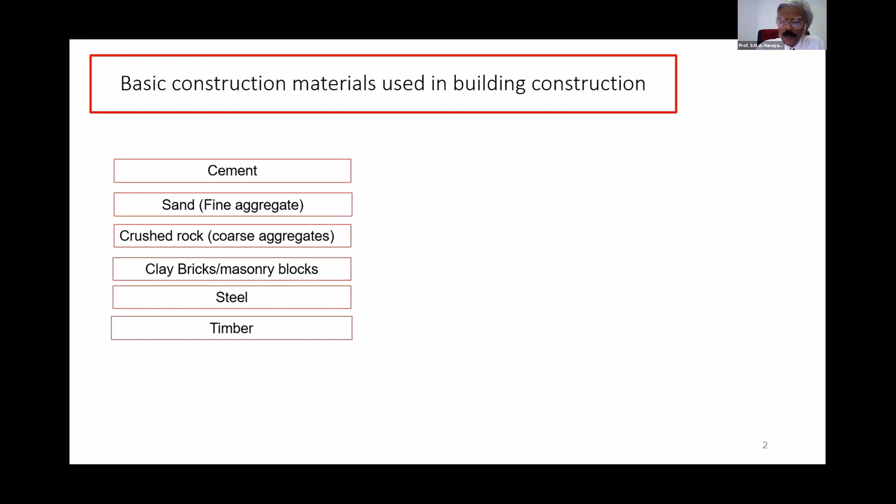These are basic construction materials used in building construction, and all these are natural resources. This chart shows the volume of natural resources used in building and transport infrastructure between 1900 and 2010. It can be seen that the rate of consumption has increased exponentially, especially with respect to concrete, sand, and gravel.

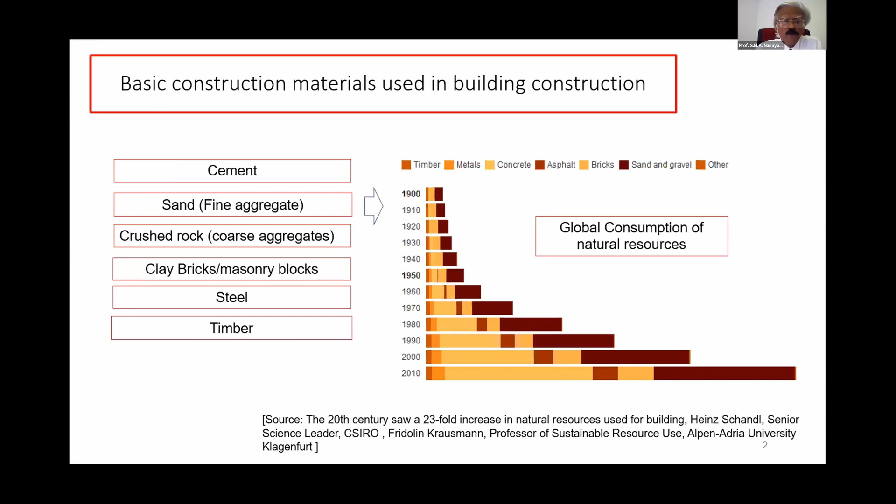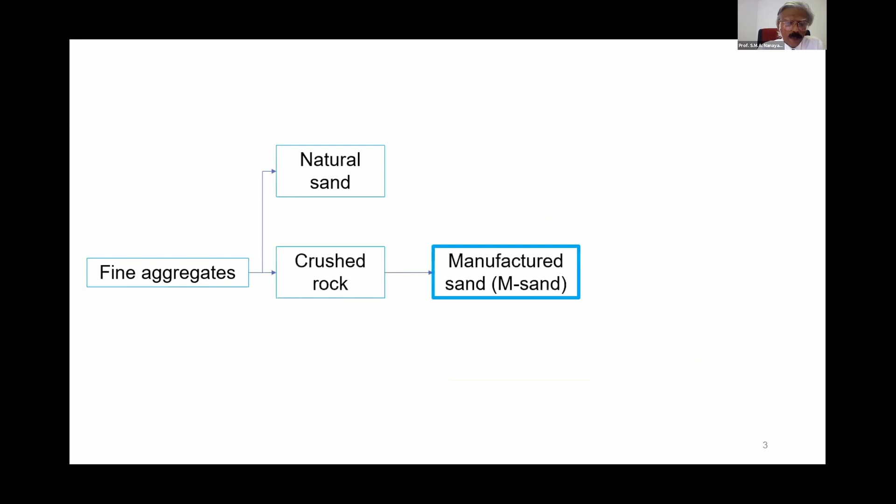The situation in Sri Lanka is not much different from that global trend. I'm going to explain the situation in Sri Lanka with respect to one construction material, that is sand. In civil engineering terms, we call it fine aggregate. Fine aggregate can be from different sources, either natural sand, crushed rock, which we call manufactured sand, or an industrial byproduct such as bottom ash coming from coal-fired power plants.

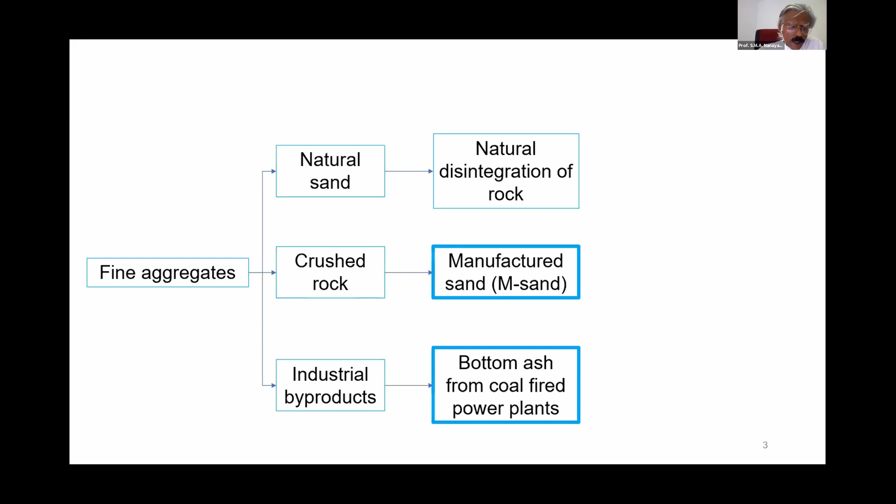The main source of natural sand used in the construction industry is river sand. There are other alternatives such as land-based sand, dune sand, and offshore sand.

Now, what's the situation with respect to river sand in Sri Lanka? This graph shows the current issue related to river sand in Sri Lanka. It shows the price variation of cement and river sand as construction materials over the last 28 years. Up to 2003, not much increase in price, and not much difference in increase in price between these two construction materials. But beyond that, the river sand price has increased by 30 times due to shortage of supply.

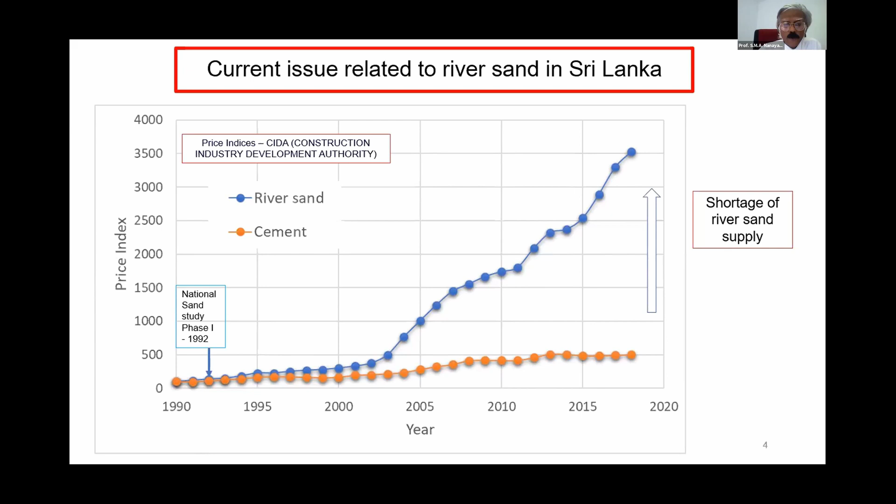This is as a result of mining and transportation restrictions imposed by the government. This trend was expected way back in 1992. There were several studies carried out in 1992, 1995, 1999, and 2002, proposing several options to overcome this situation, but those proposals were not fully implemented. The last one was in 2014 by the CIDA. The current sand price is about 16,000, varying from 15,000 to 16,000, which is very, very expensive compared with other construction materials, even with the world price.

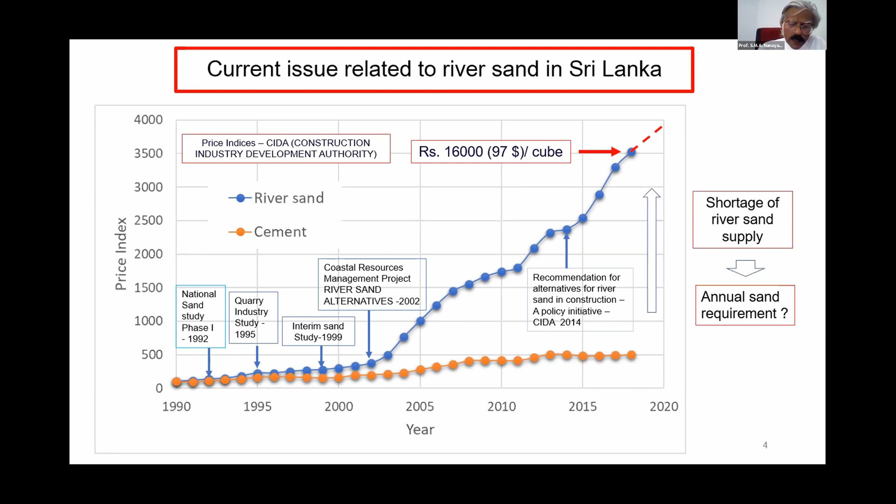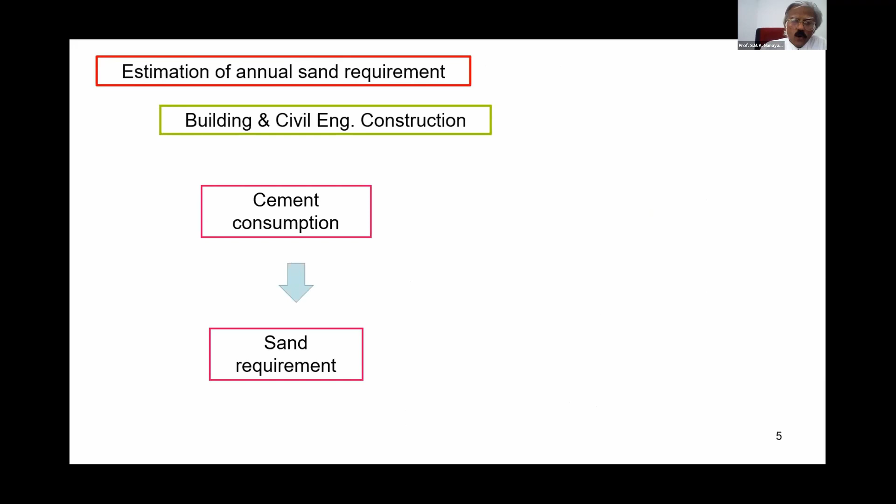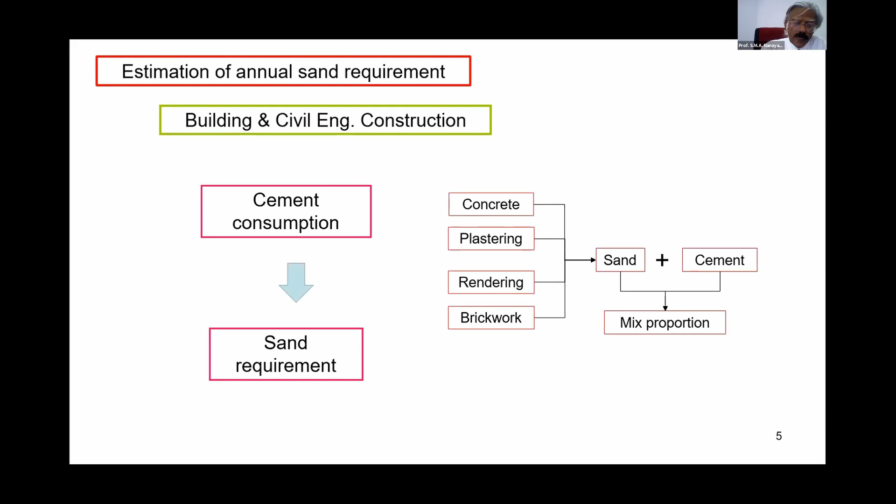Unless we come up with a solution to this, this trend will increase. So what is the annual sand requirement in Sri Lanka? Estimation of annual sand requirement for building and civil engineering construction - since there are no proper records of sand mining, the annual sand requirement was estimated based on cement consumption, as mix proportions of cement to sand for various applications in building construction are known.

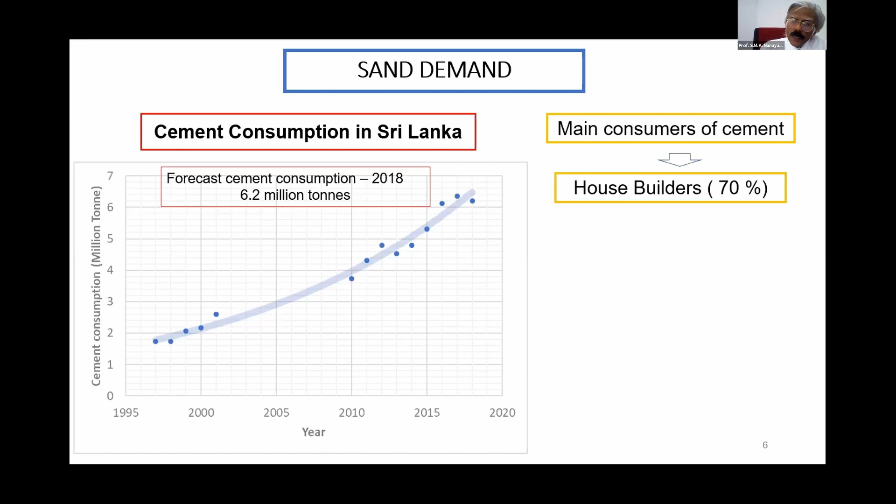According to cement manufacturers, the main consumers of cement are house builders - about 70% of cement manufactured and imported to Sri Lanka is consumed by house builders. The estimated sand demand based on cement consumption in 2018 was 22 million. Out of those 22 million, 40% was consumed in the Western province.

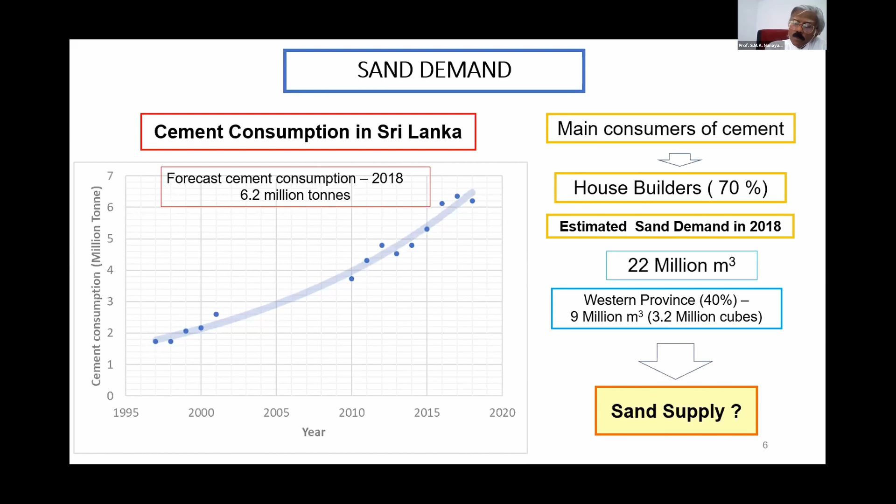Now, how about the supply of sand to the Western province to fulfill this demand? This shows the main river basins. All these main rivers were heavily mined to meet the increase in demand.

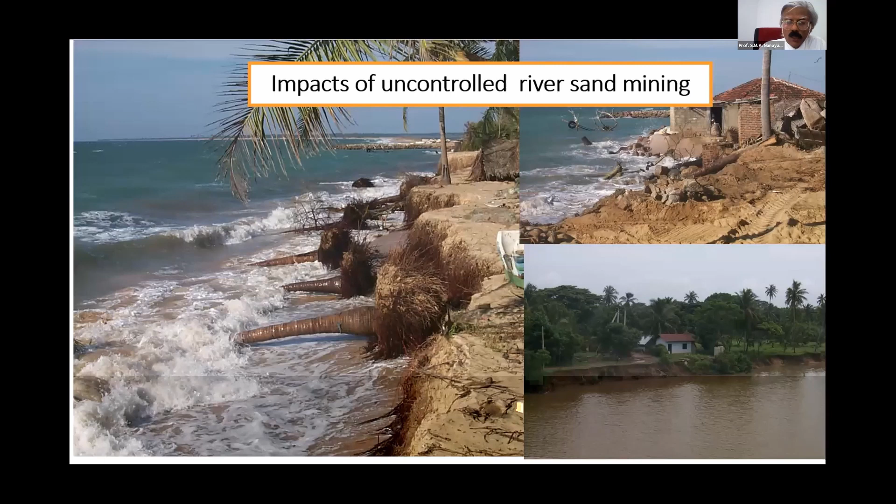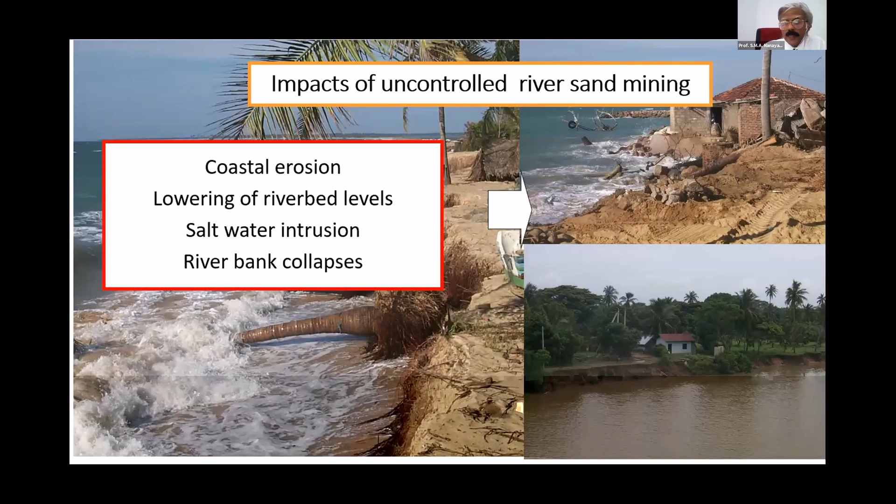The impact of uncontrolled sand mining - these photos show the impact of uncontrolled sand mining. There can be coastal erosion, lowering of riverbeds, saltwater intrusion due to lowering of riverbeds, riverbank collapses, and loss of land. As a result, it can affect agriculture, water supply, fisheries, and tourism.

So, what are the solutions that we have to overcome this environmental impact due to excessive river sand mining? The first solution is that we must restrict river sand mining at harmful locations.

Then we must try to reduce the demand for river sand in building construction. And finally, we must introduce alternatives for river sand to meet the increase in demand.

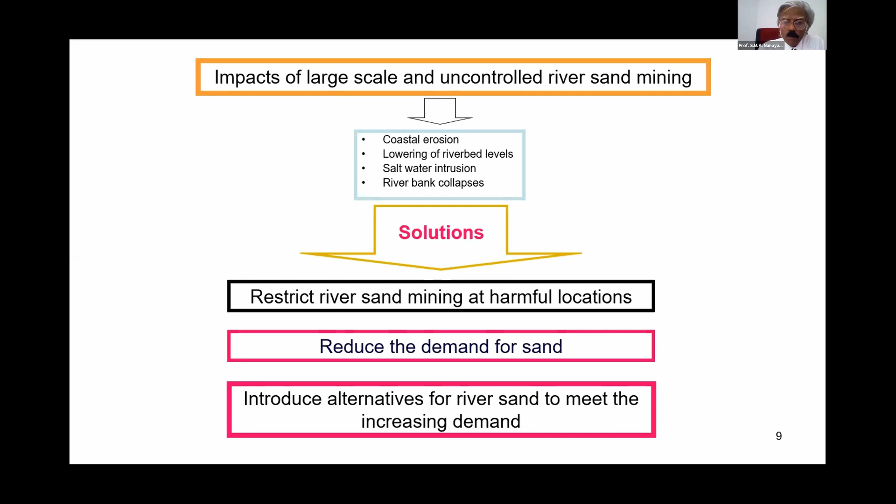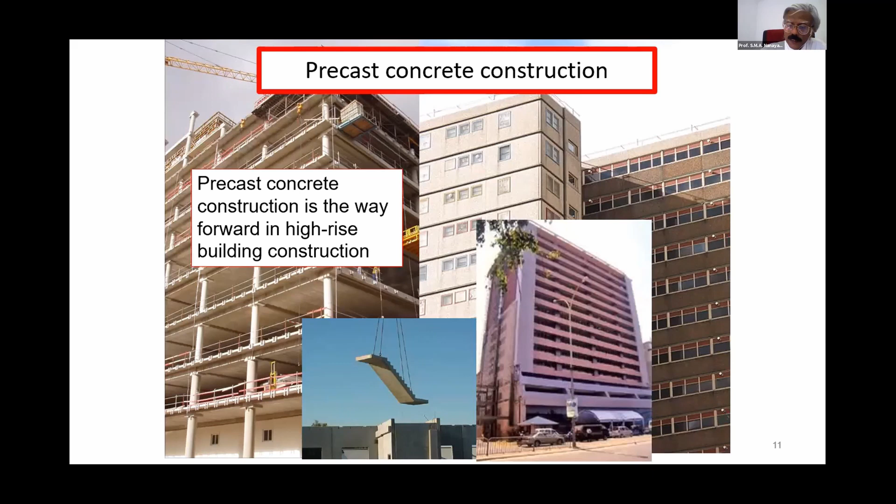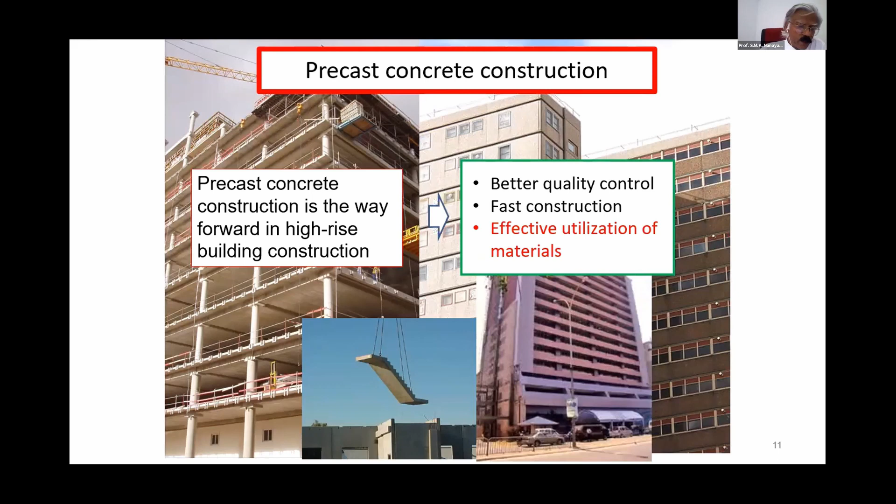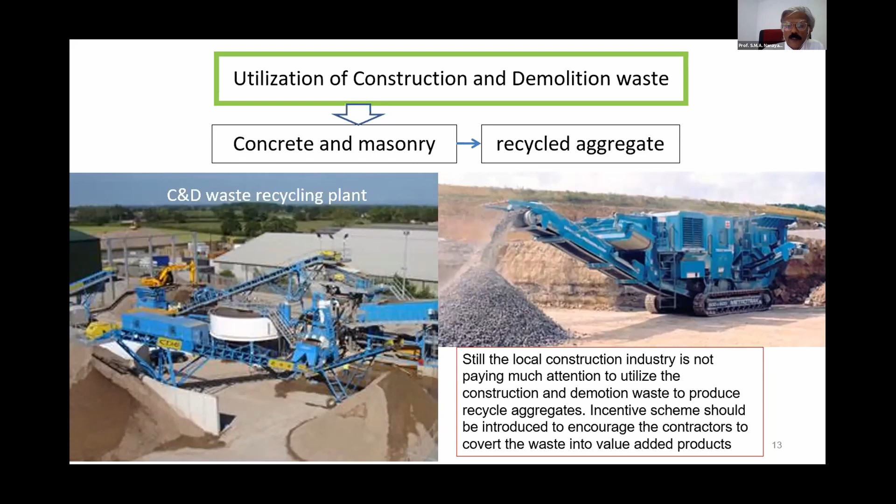Now, if you take the utilization of construction and demolition waste, we can produce recycled aggregate from this waste. There are mobile plants and fixed plants. However, the construction industry is still not paying much attention to utilizing construction and demolition waste to produce recycled aggregate. Therefore, incentive schemes should be introduced to encourage contractors to convert this waste into value-added products.

The last point is to introduce alternative fine aggregate for river sand to meet the increase in demand. That is the main point in this presentation. As I mentioned earlier, we can have land-based sand, dune sand, offshore sand, manufactured sand, and industrial byproducts like bottom ash coming from coal-fired thermal power plants.

Now, if you take land-based sand, you can see the destruction to the environment. Whenever people find land-based sand deposits, they mine those using heavy machinery, and this type of sand mining has created irrecoverable environmental damage. So therefore, land-based mining should not be encouraged.

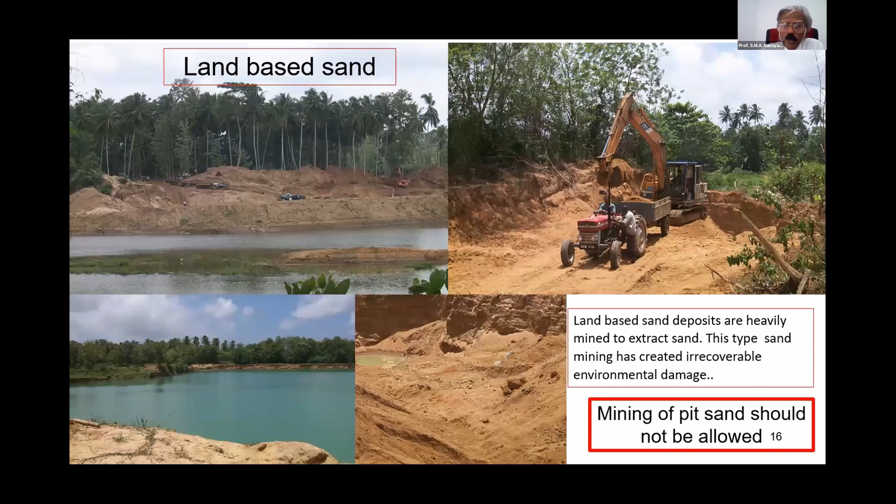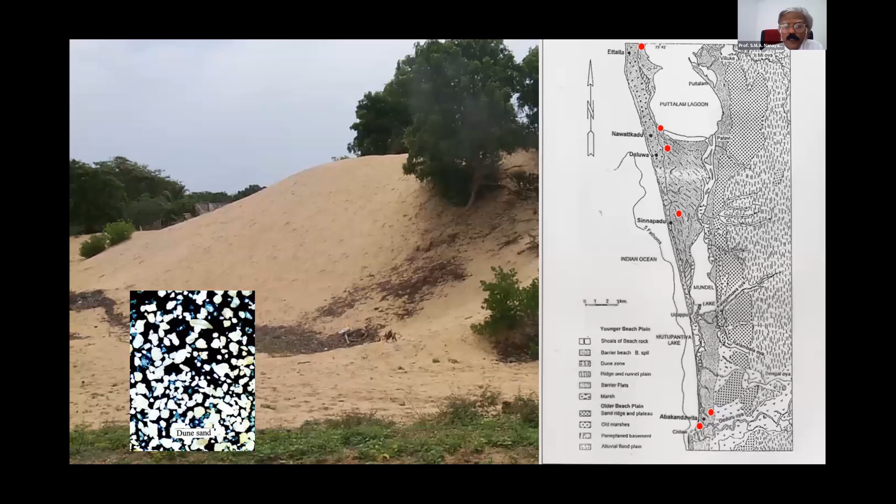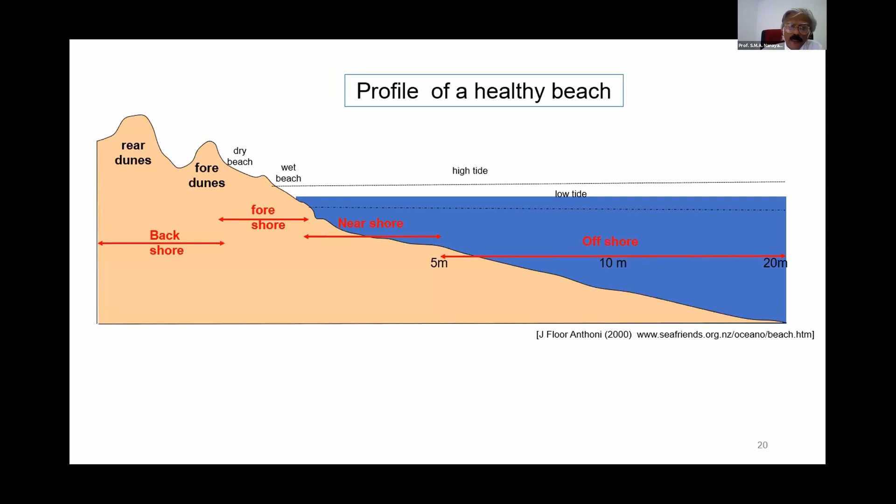The dune sand in Sri Lanka exists along the northwest coast, northeast coast, and southwest coast. These are huge sand dunes you can find in the Puttalam area. This shows the profile of a healthy beach, and dunes are part of it. So dunes are part of active coastal systems. Therefore, you should not extract sand from dunes or beaches, so that we can preserve the coastal line.

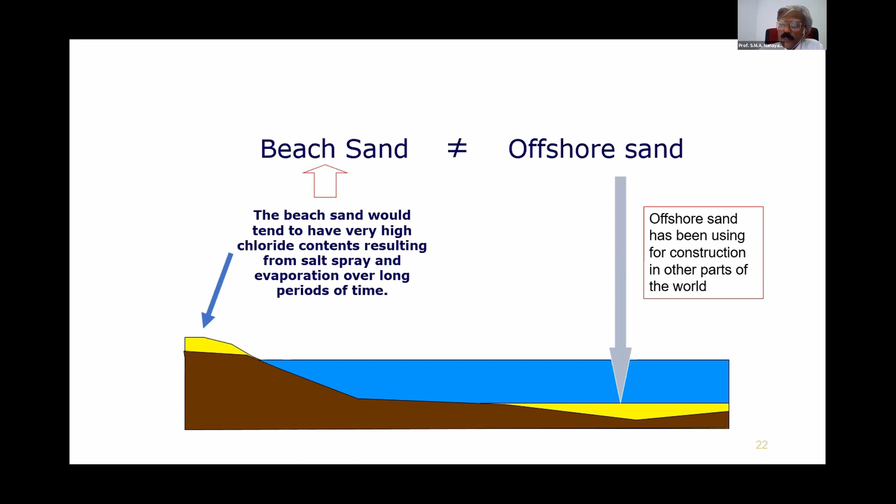So what remains as alternatives are offshore sand, manufactured sand, and small quantities of industrial byproducts. Now, if you take offshore sand, it is not beach sand that we are talking about. Offshore sand is sand dredged from the deep sea, more than 20 meters deep and far away from the coastline. Offshore sand has been used for construction in other parts of the world.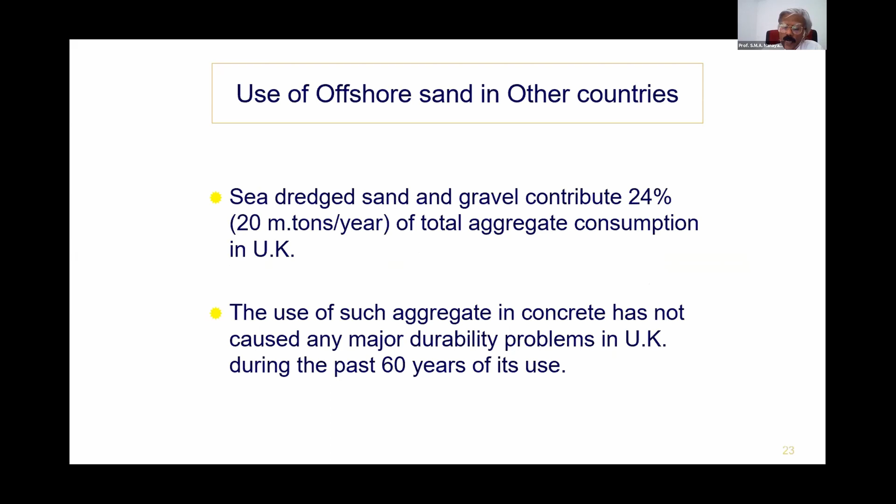So what are the problems with offshore sand? The grading, that is the particle size distribution, can vary depending on where you dredge the sand. Then there are the shells—will shell fragments in offshore sand affect the workability or durability of concrete produced from offshore sand?

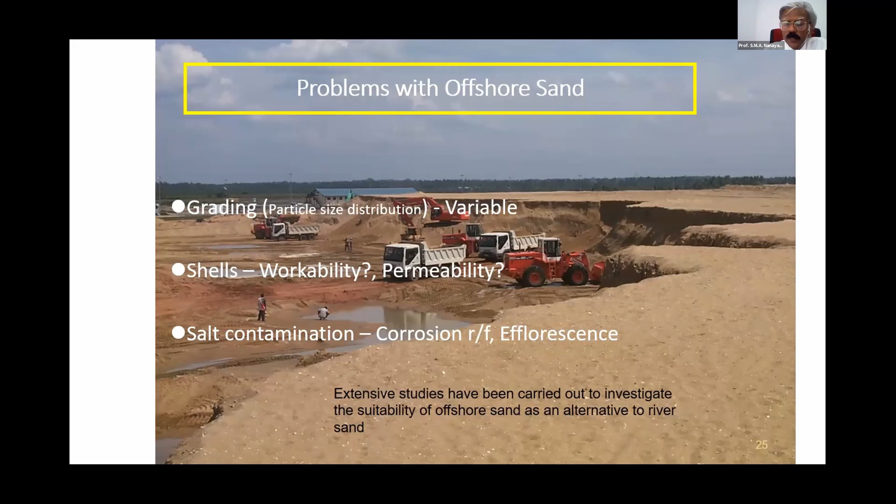And the biggest problem is salt contamination, the chlorides. That can promote corrosion of reinforcement in reinforced concrete, and you can also get white patches on the surface of concrete if you use offshore sand with chlorides. Extensive studies have been carried out to investigate the suitability of offshore sand as an alternative to river sand, and these are the results.

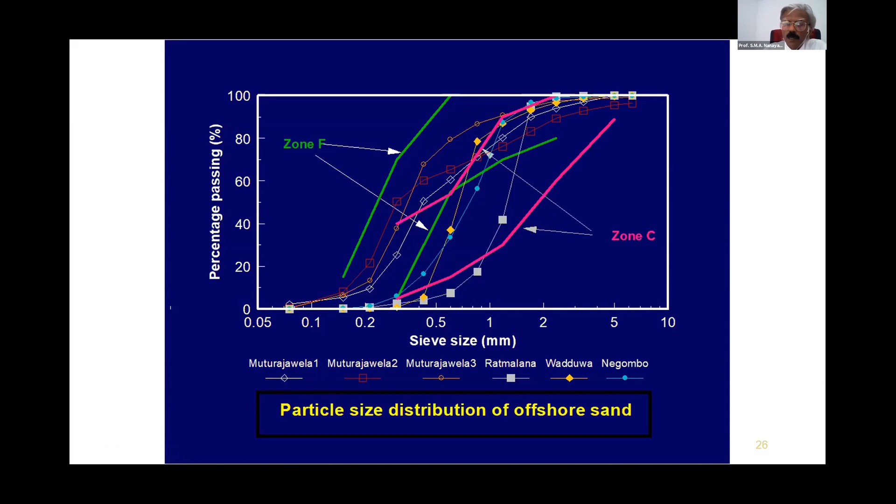This shows the particle size distribution of offshore sand taken from several locations. Depending on the location, you can see it varies from fine zone to coarse zone. Now, this is not a big issue. The particle size distribution is not a big issue—depending on the particle size distribution, we can adjust the mix proportion to achieve the required performance of the concrete.

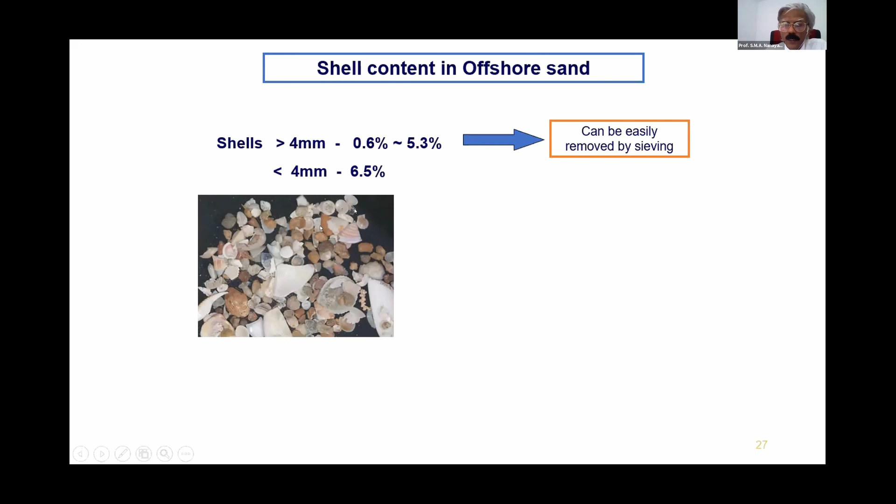The next issue is the shell content in offshore sand. We can easily remove shells greater than 4 millimeters. Now, sand is defined as particles less than 4 millimeters, so we have to remove particles larger than that, which you can easily do—this portion contains shells and pebbles.

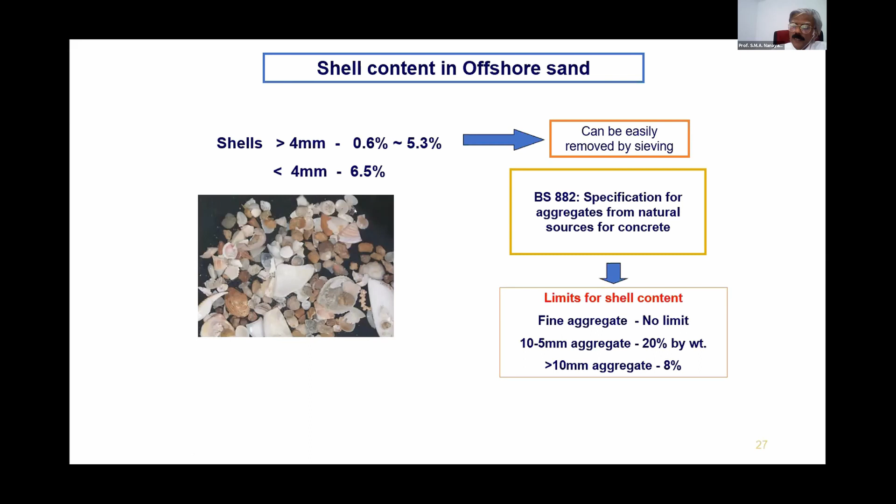Now, less than 4 millimeters, it is difficult to remove the shell fragments. There's a standard, BS 882, that gives the specification for aggregate from natural sources for concrete. There you can find limits for shell content. Interestingly, there's no limit specified for fine aggregate, but you can find limits for coarse aggregate—that is, larger particles from 5 to 10 millimeters and more than 10 millimeters.

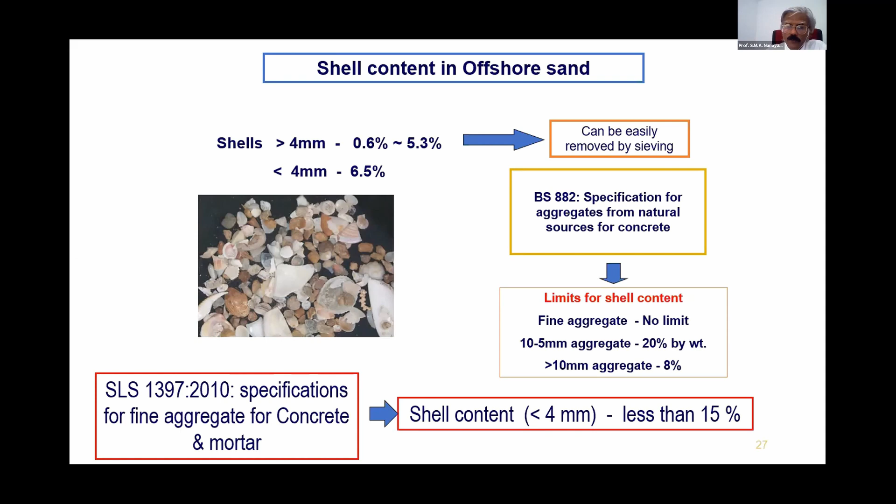Now, if you refer to the SLS standard, the Sri Lanka standard specification for fine aggregate for concrete and mortar, there the shell content is limited to 15%. These are the small shell fragments you can find in offshore sand.

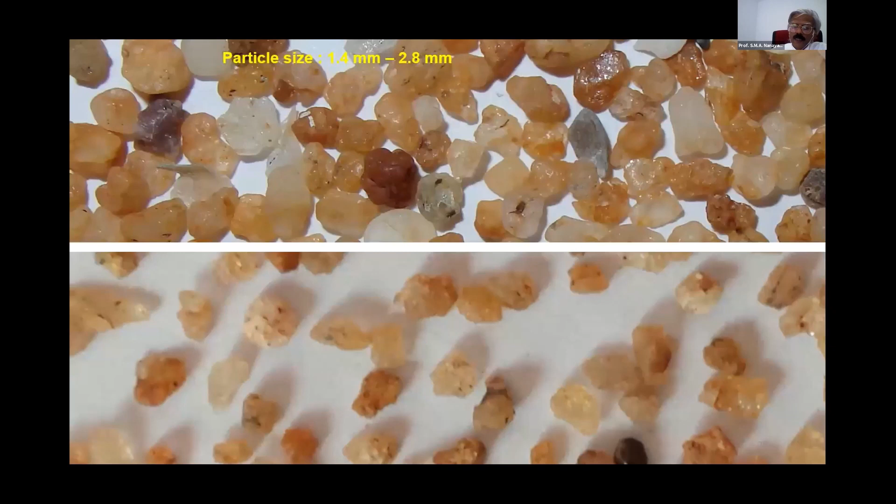Now, these two photographs show offshore sand and river sand. I cannot ask you this question directly, but I think most of you will guess the top one as river sand and the bottom one as offshore sand. It is actually the other way around.

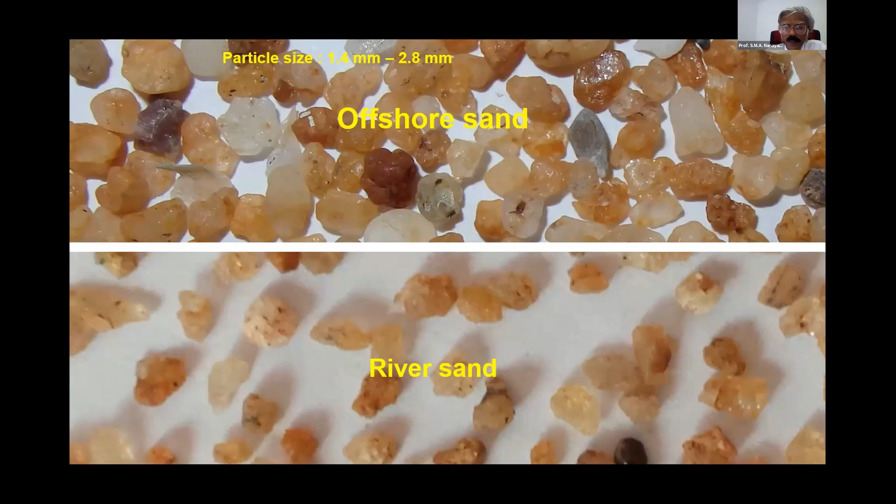Top is the offshore sand, rounded and smooth, and the bottom is the river sand. It has traveled a long distance, and during that time it got smoothened and rounded. This is an advantage - the shape and roundness improves the workability of concrete.

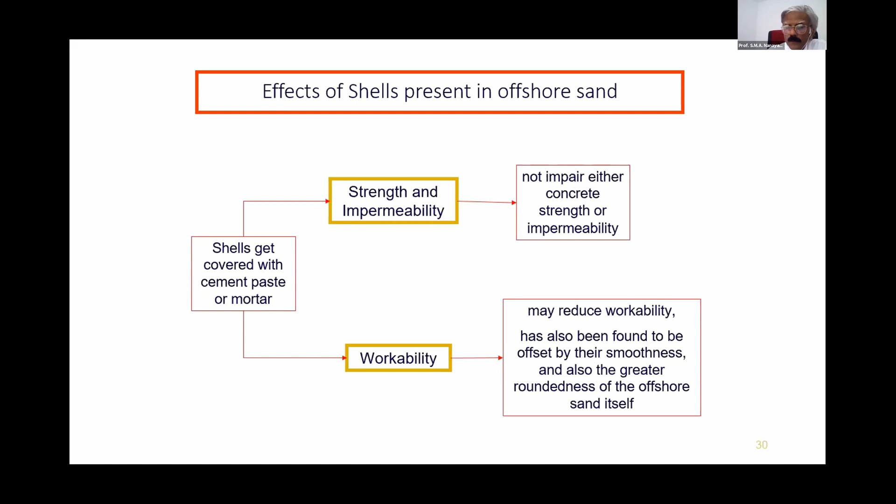The shells present in offshore sand get covered with cement paste or mortar in concrete, and that will not impair either concrete strength or impermeability. The workability may get affected because those are flat particle shell fragments, but this has also been found to be offset by their smoothness and the greater roundness of the offshore sand itself.

The biggest problem is the chloride content in offshore sand. As it is, it contains about 0.28%, and if you wash it, you can remove these chlorides.

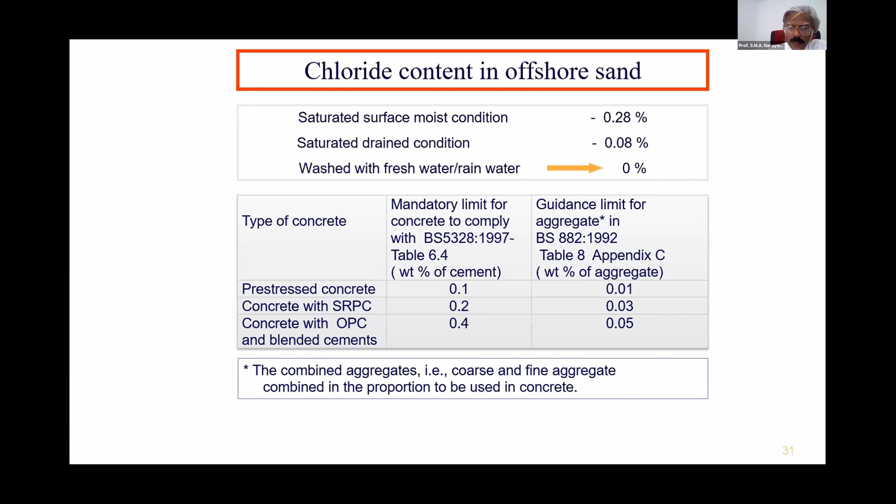If you refer to the standard for concrete and standard for aggregate, there are limits specified for chloride content in concrete depending on the type of concrete. If you convert these limits to maximum total chloride content in concrete expressed as a percentage of chloride by mass of sand for different grades of concrete, you can come up with these figures. The most critical requirement is for pre-stressed concrete, about 0.03%, and the SLS standard limits chloride to a maximum of 0.01%, very much less than the most critical requirement, to build up the confidence of the consumers.

So the recommendation is we have to sieve the sand, remove the large shells, and wash it with fresh water.

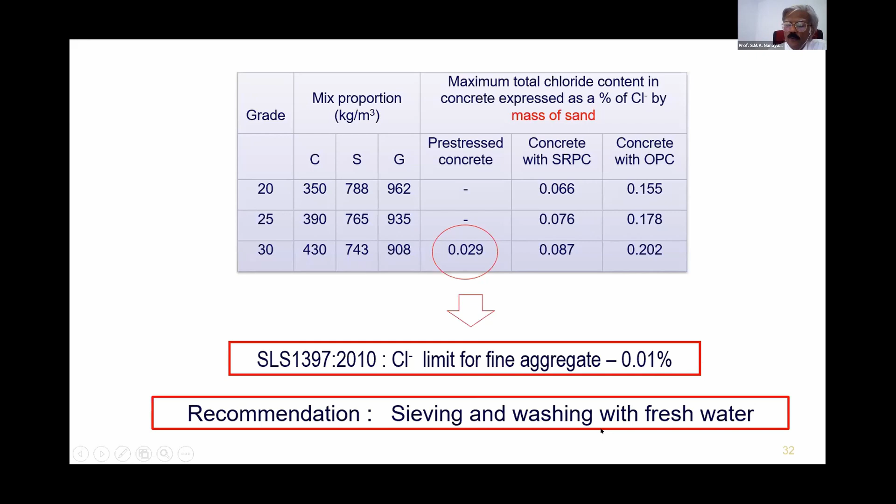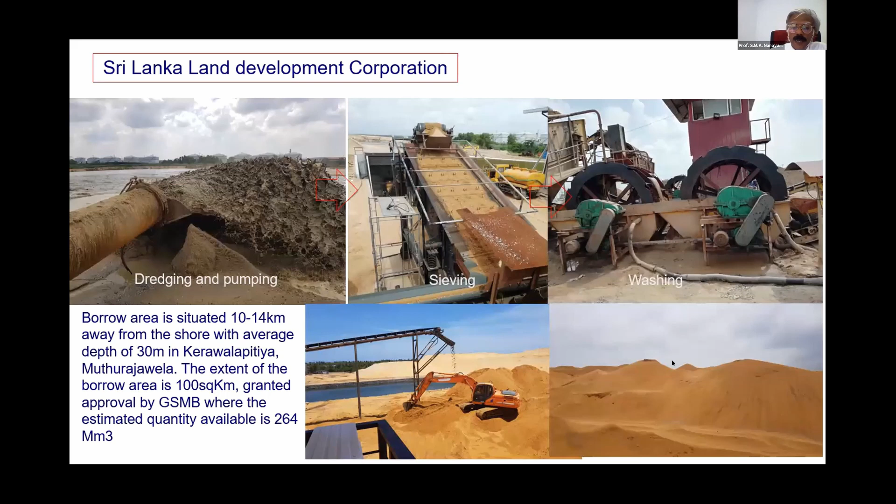Now, Sri Lanka Land Development Corporation is doing this job. They are dredging and pumping to a site in Muthurajawela, and they do sieving and washing - this is the washed offshore sand. The borrow area is situated about 10 to 14 kilometers away from the shoreline with an average depth of 30 meters in Kerawalapitiya, Muthurajawela. The extent of the borrow area is about 100 square kilometers, and they got approval from GSMB where the estimated quantity available there is about 264 million cubic meters.

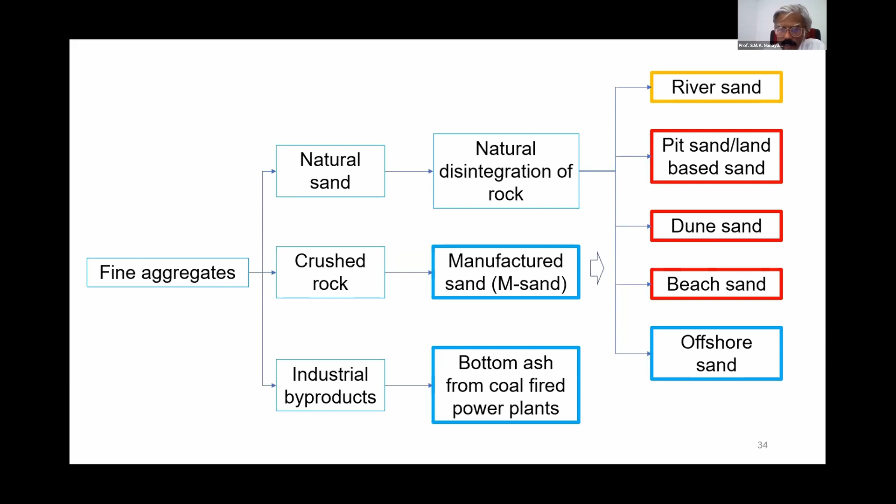Now the next one is manufactured sand. This is a byproduct coming from the production of coarse aggregate. We call it crusher fines or quarry dust, and once you process it, we call it manufactured sand. At present, it is not produced as a main product, it is a byproduct.

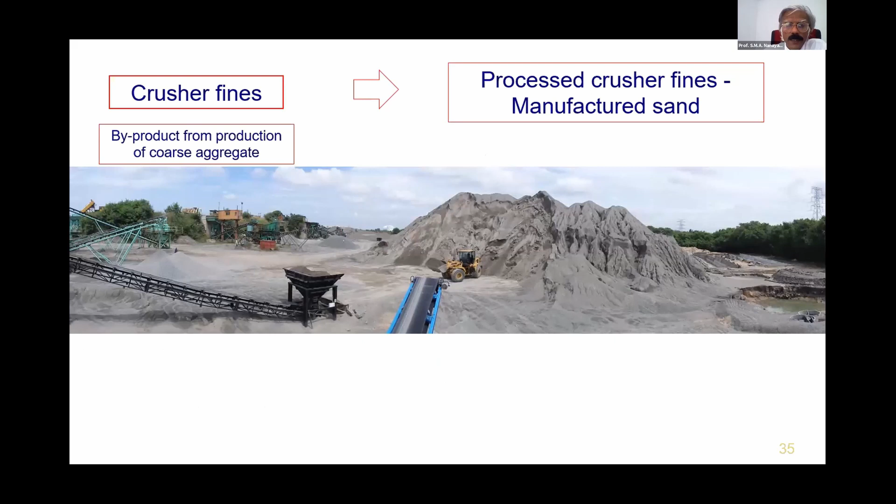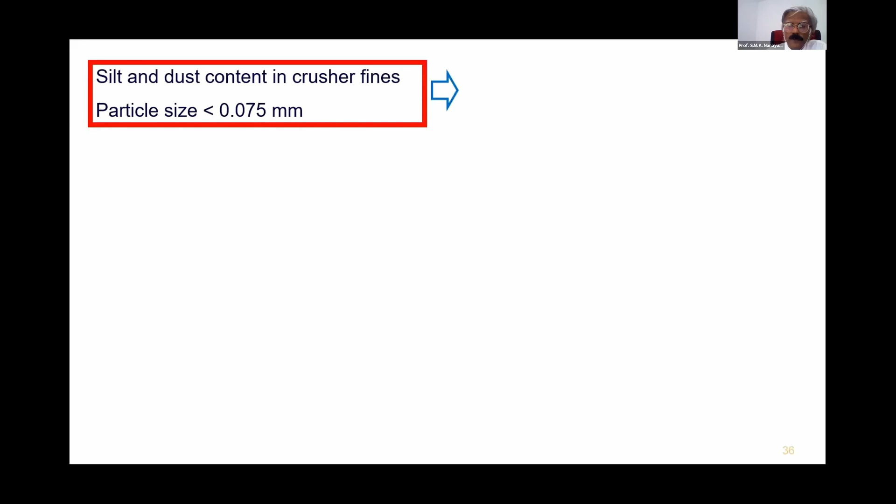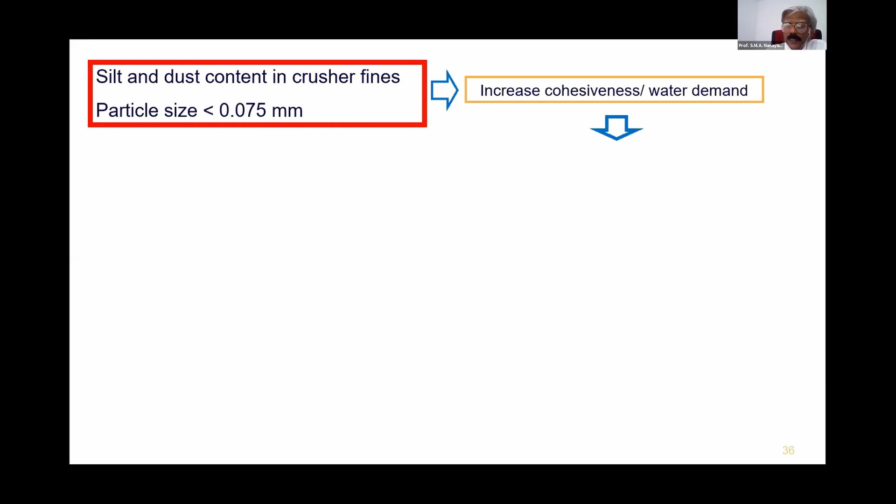Why do we have to process it? It contains very fine particles, less than 75 microns, and there are advantages as well as disadvantages of these fine particles. This fine content will improve the cohesiveness of the concrete, preventing segregation. But the disadvantage is that it will increase the water demand. If you don't use chemical admixtures, you have to increase the water content to improve the workability, which can result in increased shrinkage and reduced strength.

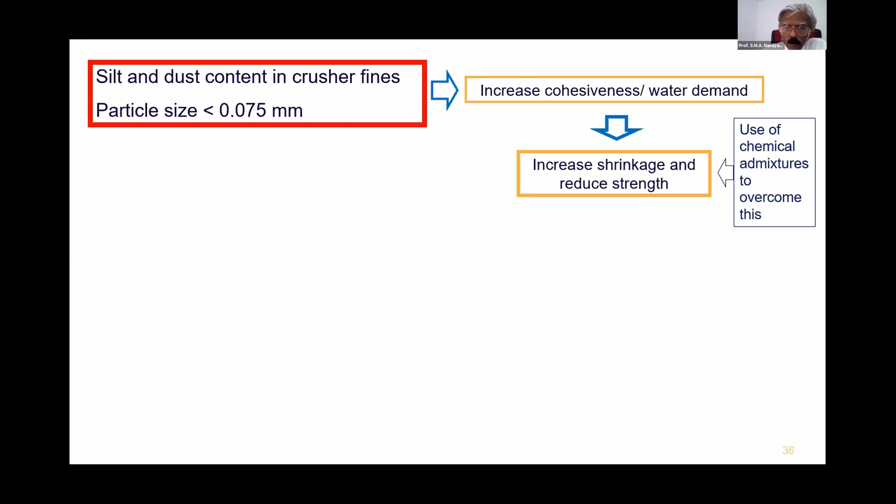So to overcome this problem, we have to use chemical admixtures. When using the manufactured sand or crusher fines, it is essential to use water reducing admixtures to improve the workability. There are limits on silt and dust content given in various standards depending on the application.

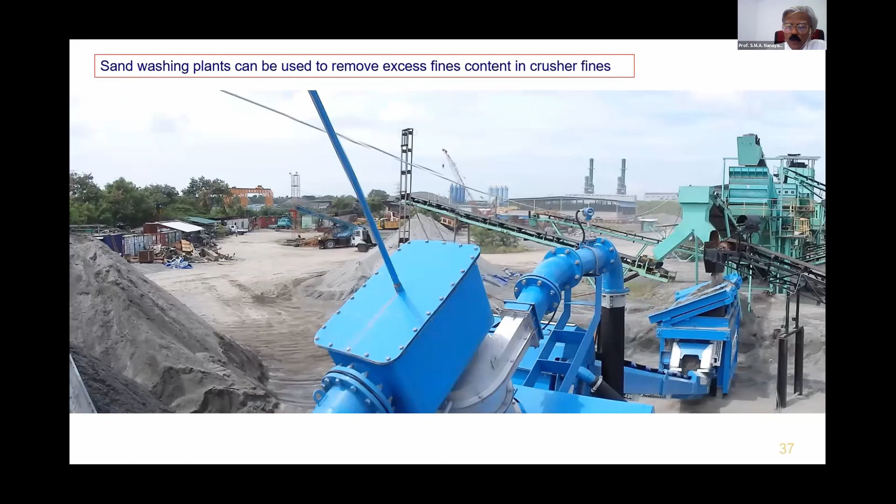So this is the washing plant that can be used to remove the excess fines, not all, but excess fines in the crusher fines. The ideal percentage is around 8 to 10%, but some manufacturers reduce it to a very low value as 3%. The last one is the use of industrial byproducts.

This diagram shows the coal combustion process and generation of coal combustion waste. We have coal-fired thermal power plants in Norochcholai. There are 3 power plants, each producing about 300 megawatts, and the daily consumption of coal is about 2,500 per plant. What are the waste materials coming out from this? There are 2 waste materials.

One is the fly ash collected at the baghouse, the electrostatic precipitator. Very fine particles, spherical in shape. The quantity is about 750 tons per day. And the other waste product is...

Just to interrupt you, sir, for a minute - we'll have to wrap up the lecture in about 1 minute and take some good questions that are waiting for you.

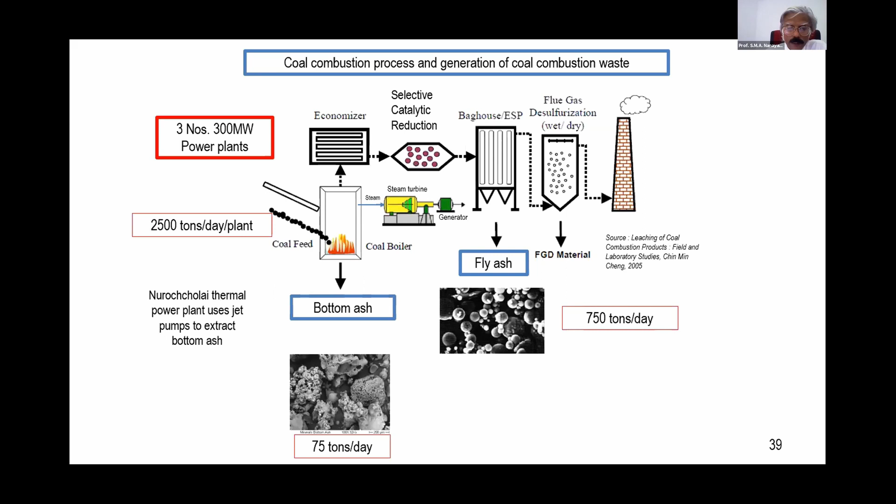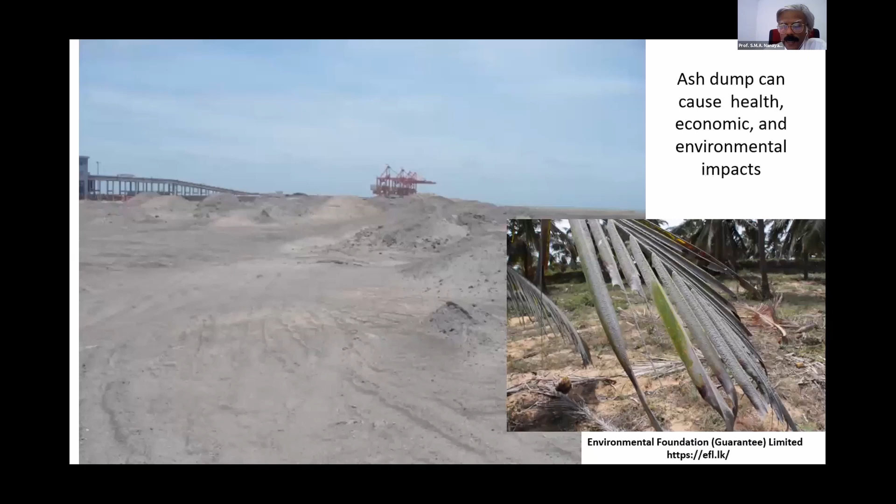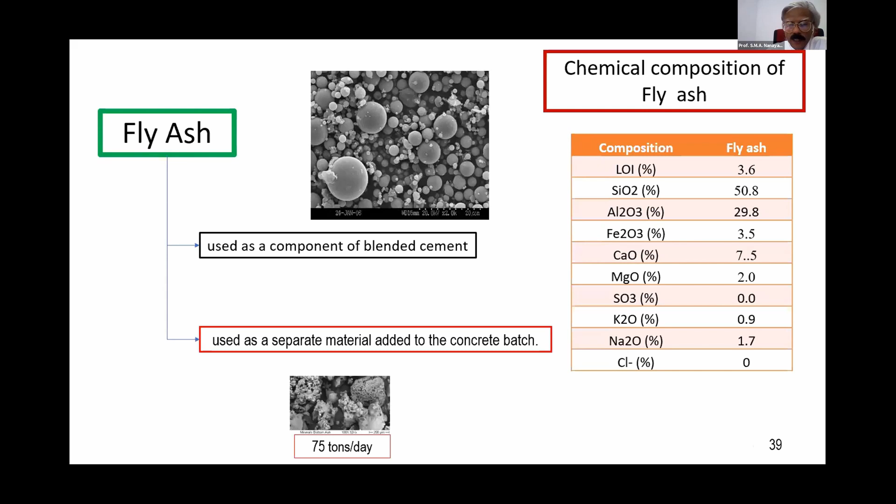Yes, sure. So the bottom ash is the other waste product, and these are not waste material - I will skip this one. This can cause environmental and health impacts, so we have to minimize these impacts by utilizing it properly. Fly ash can be utilized as a component of blended cement, and also as a separate material in concrete. Bottom ash can be used for green products, and considered as a lightweight aggregate given its properties, used to produce lightweight cement blocks, foam concrete, and geopolymer concrete.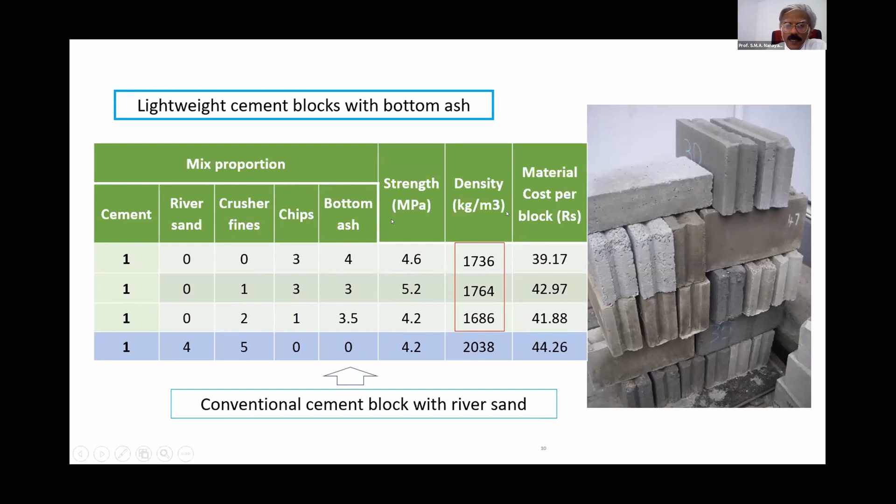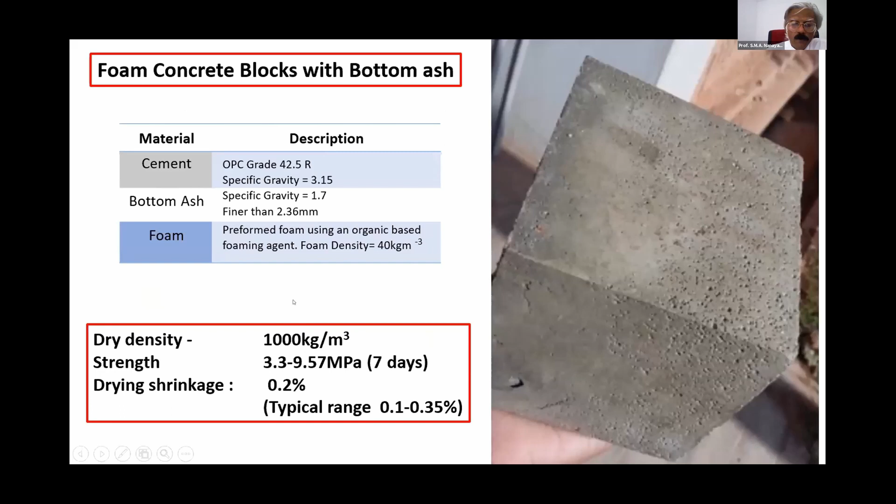And this is another product. I'm not going into details, as time is running out. The foam concrete—you can reduce the weight further by using a foaming agent.

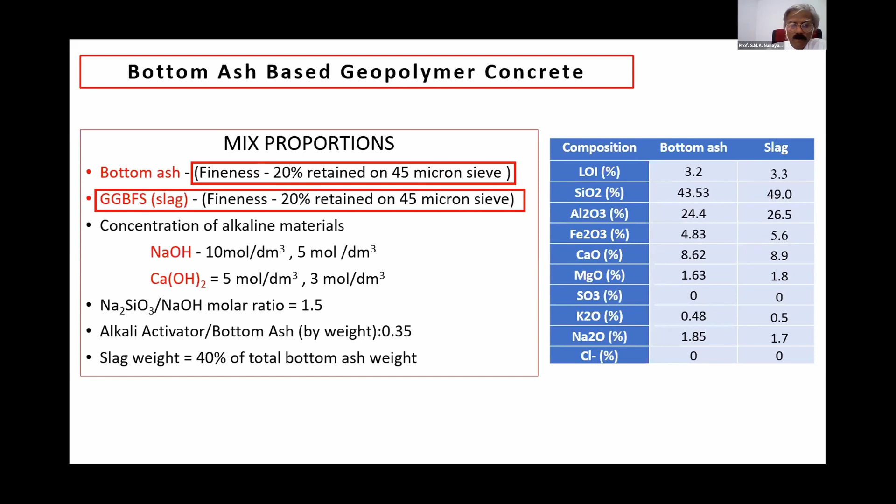The bottom ash is a 100% waste product, crushed bottom ash based geopolymer using 100% waste product. The other one is slag, another industrial byproduct from steel production, activated by alkali materials. And the most important thing is ambient curing, which allows us to obtain these kinds of solid products.

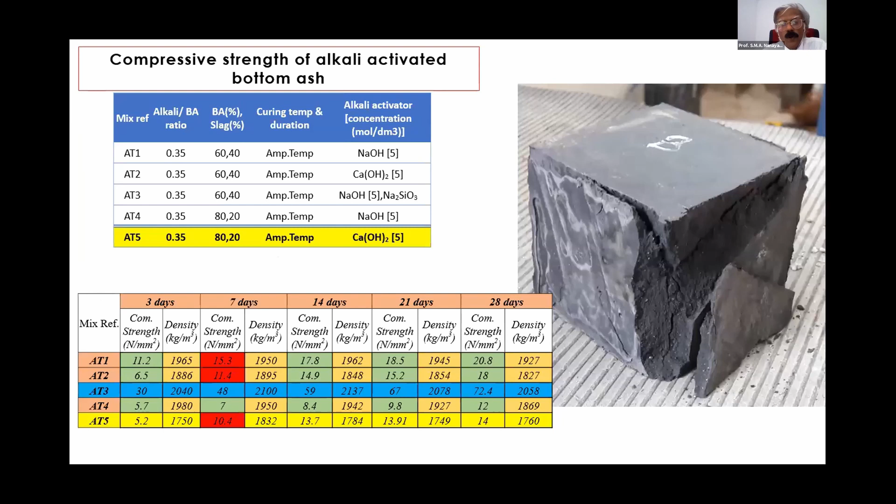Professor, shall we go to the questions? Yes, because we are definitely running out of time. Let's ask 2 or 3 questions, that will be better. Don't worry, your presentation will go to the viewers and participants in digital format, so you will not lose your effort at all. And rushing it through won't help either party.

So the first question is something like this: a lot of alternative materials have been found in Sri Lanka, but they never make it to the market. Why is that? A short answer.

So they are not really being used. What's the reason—is it lack of incentives for those who make them? The lack of awareness, especially now with these two materials. People are still afraid to use offshore sand because of adverse effects, thinking the chloride will still be there. So lack of awareness is the most important thing.

Very good. And what do you suggest the professional bodies should do about that? Because the awareness must come from professionals like yourself.

Exactly. The main problem with professionals is that they know this can be used, but they are reluctant to specify it. If you consider government organizations, they still insist on river sand, even though they jolly well know alternatives can be used. But in their specification, river sand is specified—that is the main problem. The professionals themselves need to change their mindset and go for these alternatives. Until that happens, you cannot change it.